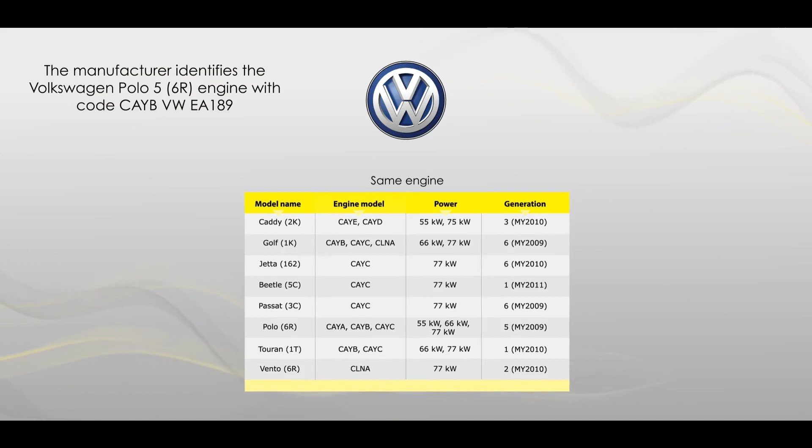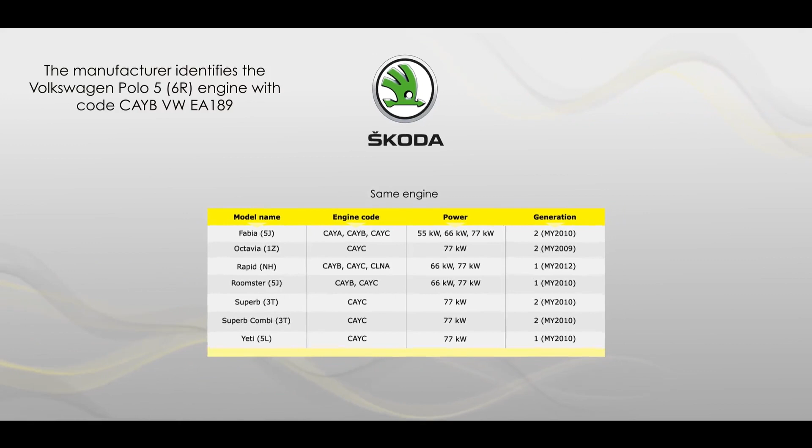This is why this course represents a valid starting point for tuning the following vehicles, whose technical specifications are shown in the tables. Volkswagen Group vehicles equipped with the same engine but with different maximum powers, as reported in the chart, are Volkswagen Caddy, Golf, Jetta, Beetle, Passat, Polo, Touran and Vento. Skoda vehicles are Fabia, Octavia, Rapid, Roomster, Superb, Superb Combi and Yeti. Seat vehicles are Altea, Ibiza, Leon and Toledo. Lastly, Audi vehicles are A1 and A3.

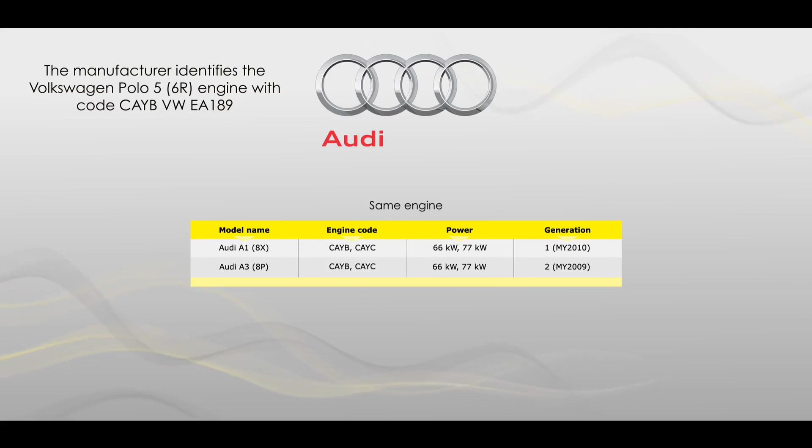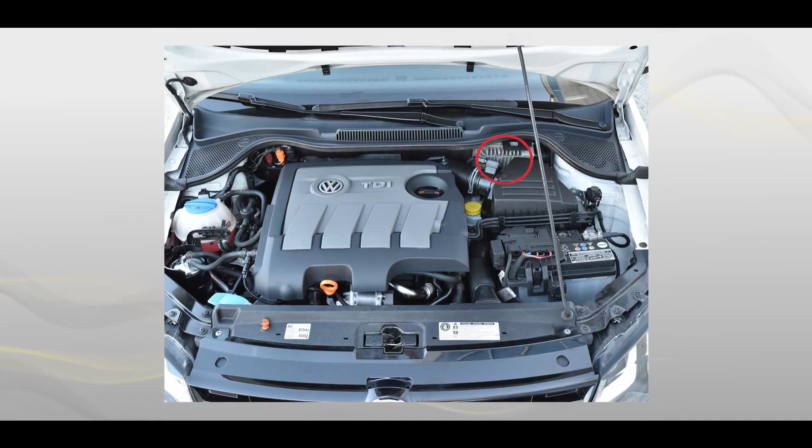This control unit is given a Volkswagen Auto Group hardware number and a Continental hardware number. It is still possible to collect the main data of the ECU by using the identification function of either KESSv2 or KTAG. In this vehicle, the engine control unit is located on the right, under the air filter. The label is not visible, and the main connector is linked to sensors and actuators through a standard configuration.

The OBD2 diagnosis socket is found inside the cabin, centered under the steering wheel at the driver's knee height. This diagnostic socket, linked to a specific diagnostic tool, will be used to check that the vehicle does not show any malfunction, such as a DTC error that can't be detected by a superficial analysis. It is strongly recommended that you act on a vehicle only if it is in perfect condition. Any unresolved problem can only worsen after the tuning process.

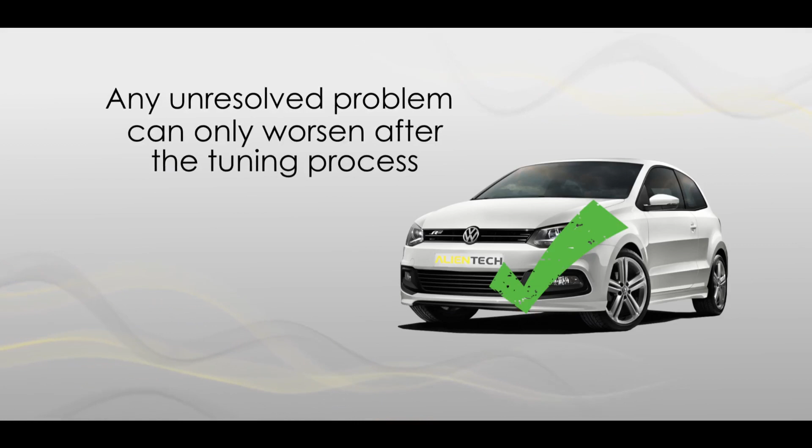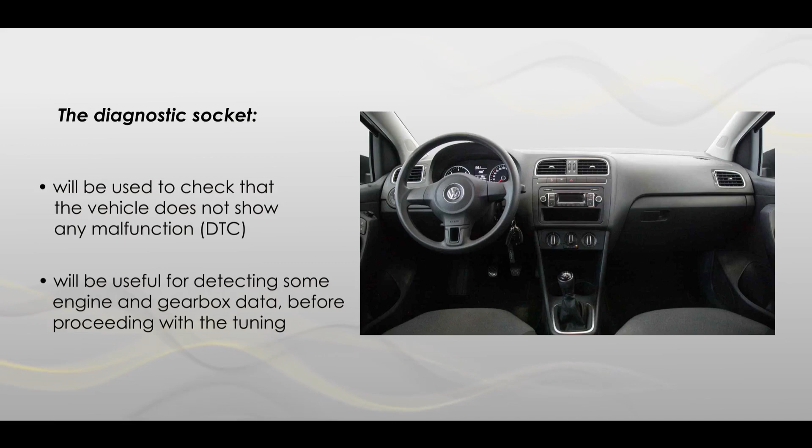In addition, since the vehicle is equipped with a dual-clutch transmission that requires greater maintenance, this diagnosis socket will be useful for detecting some engine and gearbox data before proceeding with the tuning. The Continental Simos PCR 2.1 control unit of the Volkswagen Polo 5 can be tuned either with CASV2 or KTAG. KESSv2 connects to the control unit by protocol number 352 and allows reading of the engine control maps that are found in the original file.

This protocol presents two different communication methods: Old Family and New Family. We recommend choosing the most updated New Family. The available functions are ID and virtual reading, writing and recovery. KTAG connects to the control unit on bench through protocol number 994 that offers the password reading function to unlock the control unit. To select the correct protocol, it's necessary to know the brand and model of the microcontroller. In this case, it is an Infineon TriCore 1796.

Unlike KESSv2, KTAG allows performance of a complete reading of the original file and of the EEPROM memory. The control unit in question is available in two different hardware models and with two types of connections. There are detailed instructions for connecting each hardware model to the control unit on bench. By choosing Direct Connection with Positioning Frame EVO, it is easier to connect the control unit to the KTAG, since only the cable tips need to be correctly placed, without any soldering.

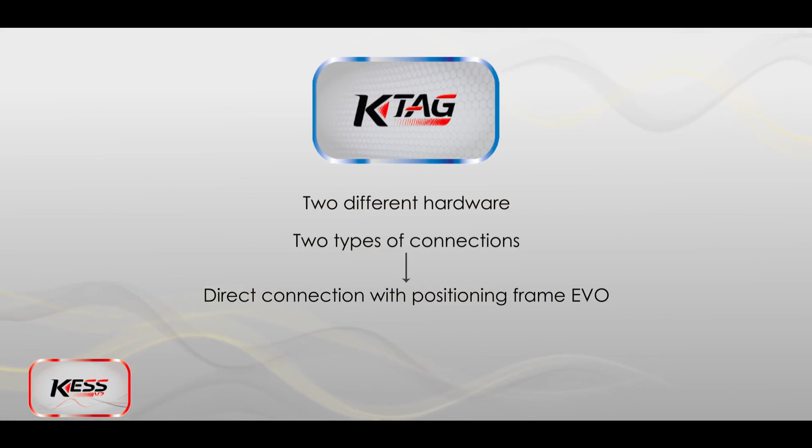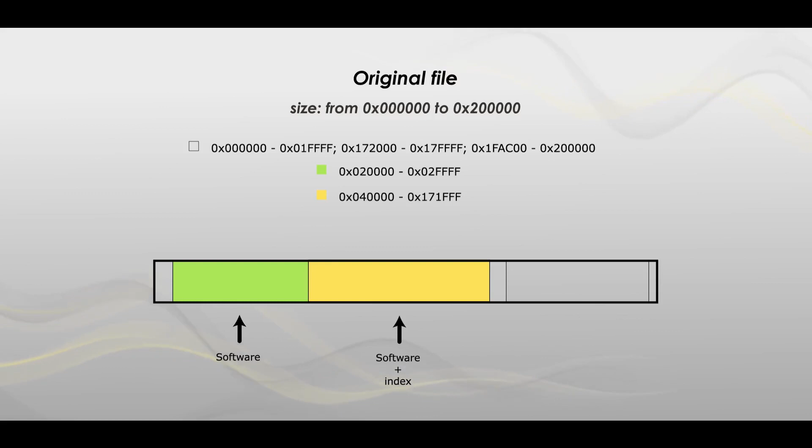The size of the original file within the control unit of the Volkswagen Polo 5 goes from 0 to 200000. The structure of the original file is as follows. The first, the fourth, and the sixth zones are empty, ready for future updates. The second zone contains the software. The third zone contains both the software and the index. The fifth zone contains the maps.